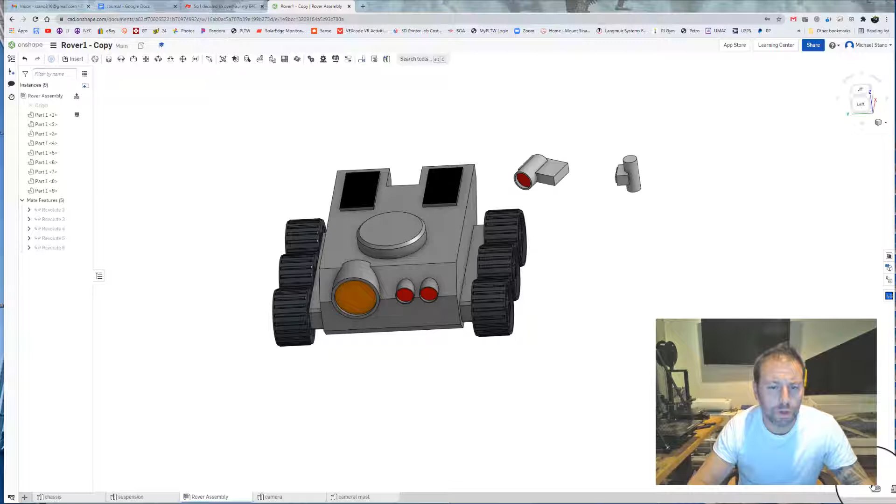Everybody, and today we're going to take a look at some different types of mates and gear kind of mates within this rover project, or really for that matter any project.

So we can see here I have a rover, 6 wheels, and if we want to make the one wheel move, you can just right click on it and hit animate. When you do that, you hit play, and then your wheel is going to move. And you can play with the playback options, such as the number of steps. So if I drop the number of steps to 100 and hit play, you can see it moves a lot faster.

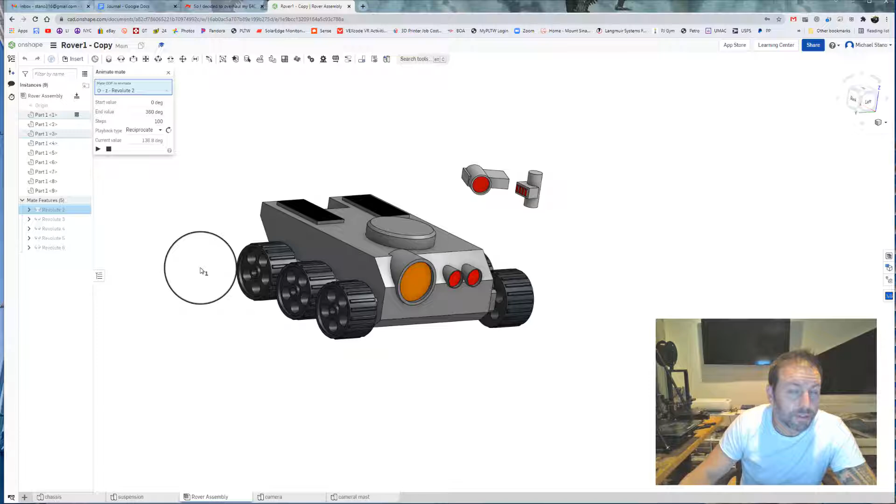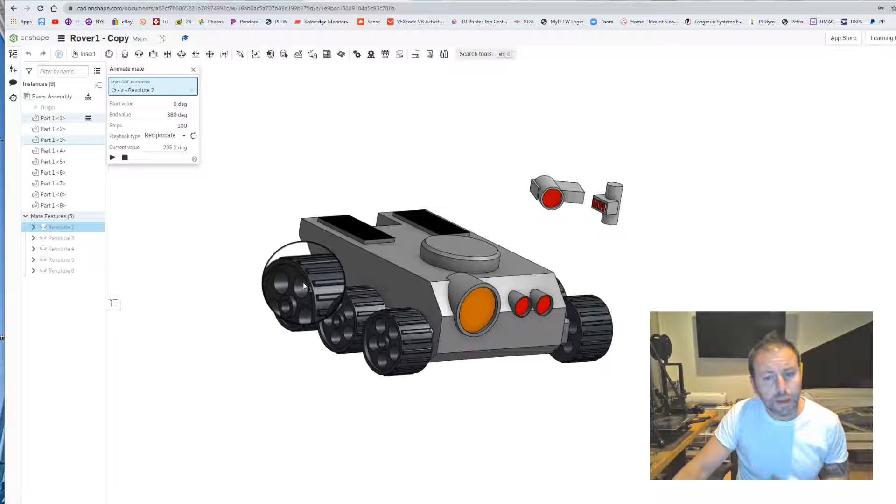That's all well and good, but if we want all these wheels to move together, we're going to have to use this gear relation up here. So by using a combination of mates and relations, we can get multiple things to move at once. So what I figure I'd do is I'll show you how to install this little camera system and mast onto here and kind of get everything to move together all at once. So let's give that a shot and get going. So for people that don't know how to use the mates, you'll get a taste of that here as well.

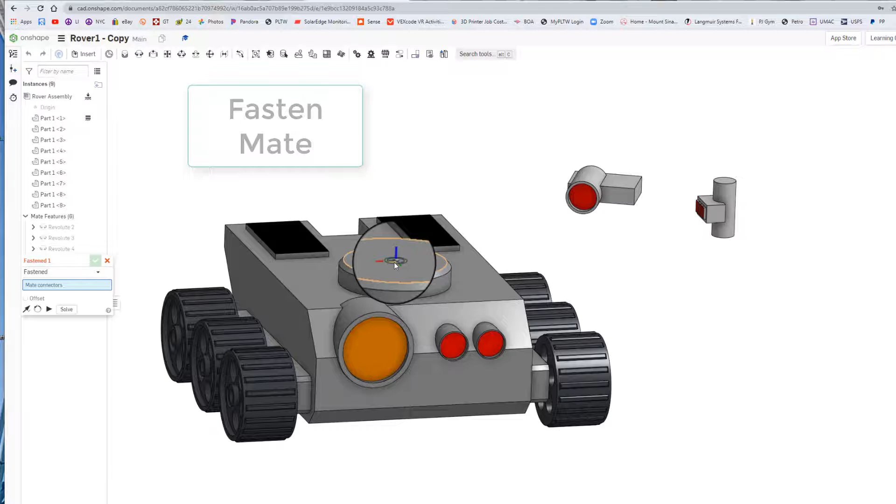So the first thing I want to do is I want to take this mast, which is for the camera right here, and I'm going to place it dead center on here. Now I'm going to use just a straight fasten mate. So I'm going to click the fasten mate. All right, click there right in the center, and I'm going to come underneath and click that in the center. All right, so now this is fastened to that. I can also change the axis that it's on, just in case they were backwards or not, and leave it just like that. So I'm going to hit the check mark.

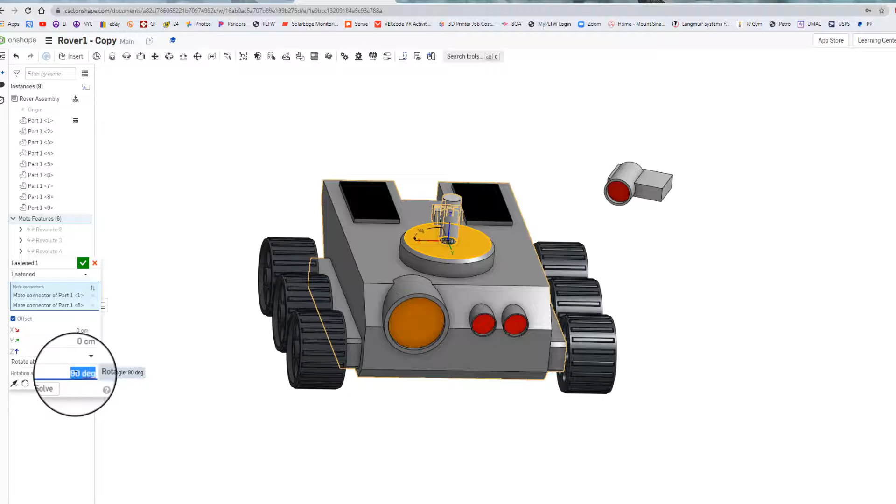Now, if I want this little side piece to stay there, I'm good to go. But if I want to change its location, I could right click on it, hit edit, and then I can come in over here and change any sort of offset or rotation around that X axis. So let's see, if I want to change the rotation around the Z axis, I can do that, and I can change it to say like 90 degrees. Then I hit it, and you can see that it now moved it to the back. If I want it to the front, I would probably have to go to 270. And there it is to the front, and I am good to go.

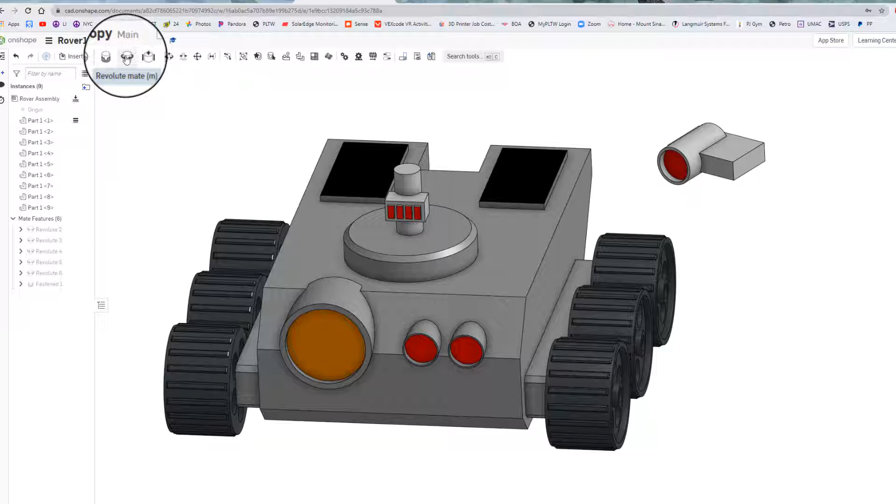So we're going to say that my camera system has these little buttons there in the front. Now what I want to do is basically set the camera on top of the mast. Now for that, I'm going to use a Revolute. So the Revolute mate will allow it to rotate along that axis. Right here, a fasten is not. It's going to stay solid the whole time. So you can see here on the bottom of my little camera system, I put the little spot there for it to mate. You could use a point or really anything else.

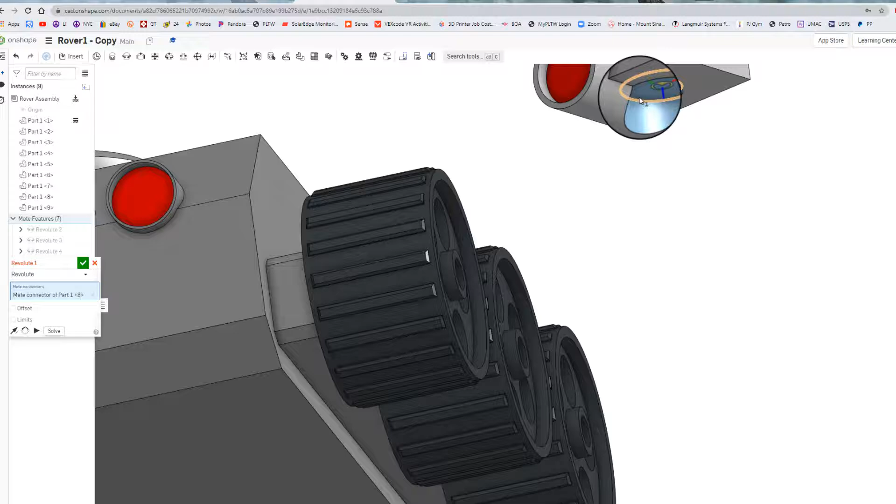I put a hole. So I'm going to go to Revolute Mate, click the top of that, come over to here, go into that circle, got it, click, and now my camera is mated to that. And I'm just going to hit the check mark, close that out over there, and now that's going to move. So if I want this to rotate around, click, animate, and I hit the play button, and now my camera's going to rotate. So right now that's only one movement, and it's easy enough.

But what if I wanted not only this to rotate, but the wheels to rotate, to kind of show as the rover's moving along the ground, it's also scanning the environment for whatever. So in order to do that, I need to use a gear relation. So that is right there, gear relation. So let's just check off on that.

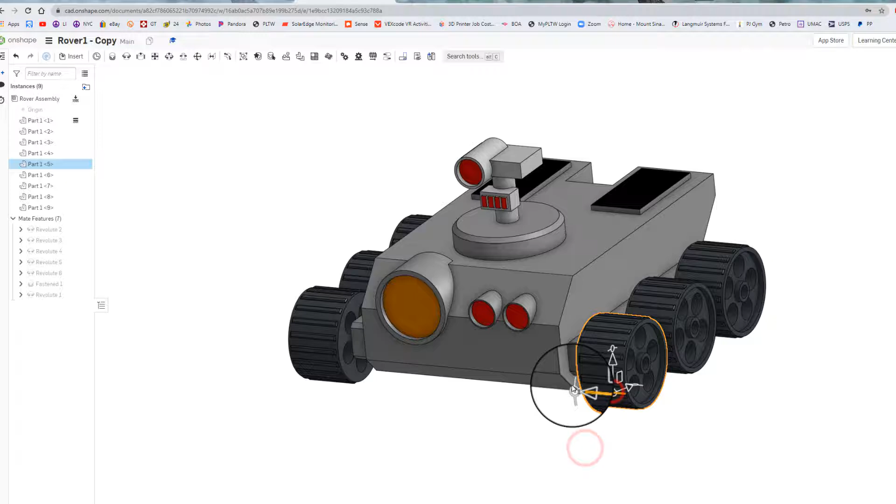So right now, if I take any one of these wheels, let's pick this front left one right here. All right, so let's see which one we got right here. So that's my Revolute 3. I'm going to right click. Let's hit animate, hit play. So right now, only one wheel is moving, and we want all the wheels to move. And we want them all to move together like it's moving along the ground. So in order to do that, we'll use that gear function.

So I'm going to pick a gear relationship, and I have to pick the mates that I want to associate with this wheel. So let's look at maybe the front 2 wheels. So we can pick that one right there, Revolute 6, and then I'm going to look for that other wheel right there, Revolute 3. So now those 2 wheels are going to be locked in together in a relation ratio of 1:1. So as one moves one full rotation, the other one's going to move a full rotation. And we can reverse the direction, but let's wait and see what has actually happened with the motion first. I hit the check mark.

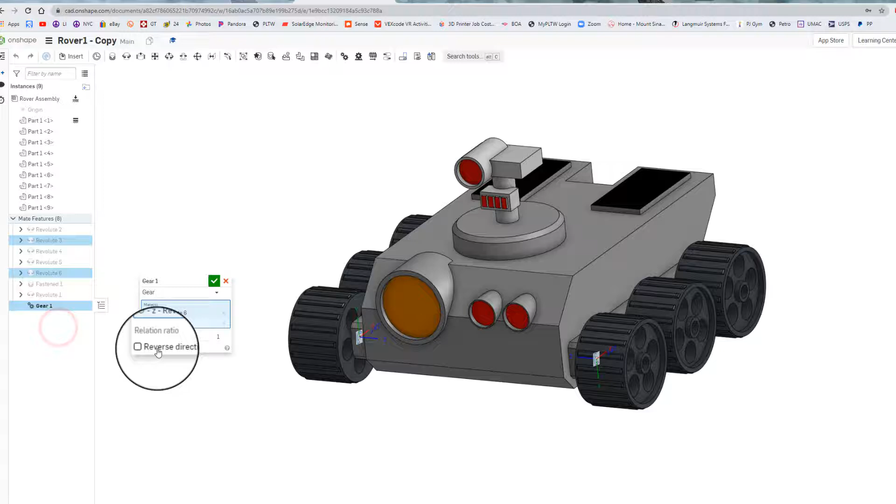So now I can go to that gear relation right here, and let's see what that was. Revolute 3, right click, animate that, hit play, and now my wheels are moving, both moving backwards. If I want to go forwards, I can go in and change the gear relationship. It's pretty easy. So right click, hit edit, reverse direction, hit play, and now when I go to that one, right click, animate. So now they're moving the wrong way because I reversed the direction of one and it didn't change the other. So let's go back and fix that.

Okay, so we animate that. I can reverse the playback there, and let's go loop, and now play. So now they're going in the right direction. Sometimes that'll happen because as you flip a wheel from one side to the other, it's the same part, the axis gets swapped. But I'm going to playback loop. I just reverse my direction there, and I'm good to go. So now those wheels lock together, and now I need to start locking the rest of the wheels together.

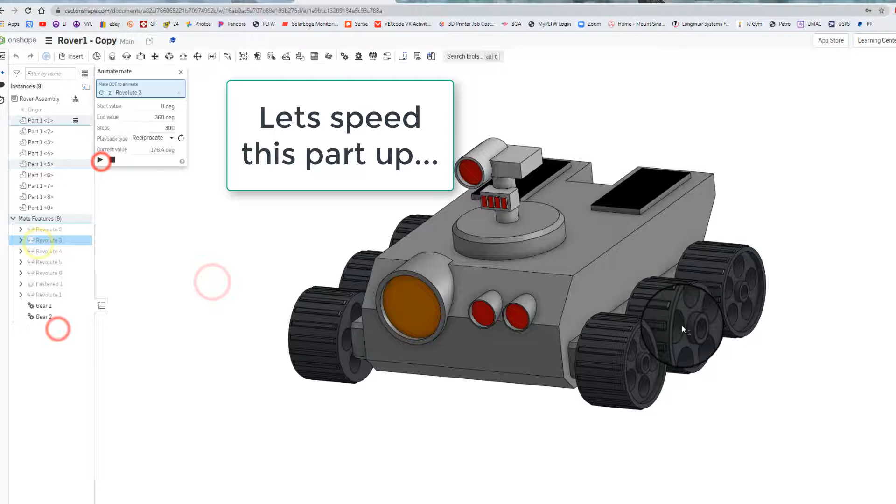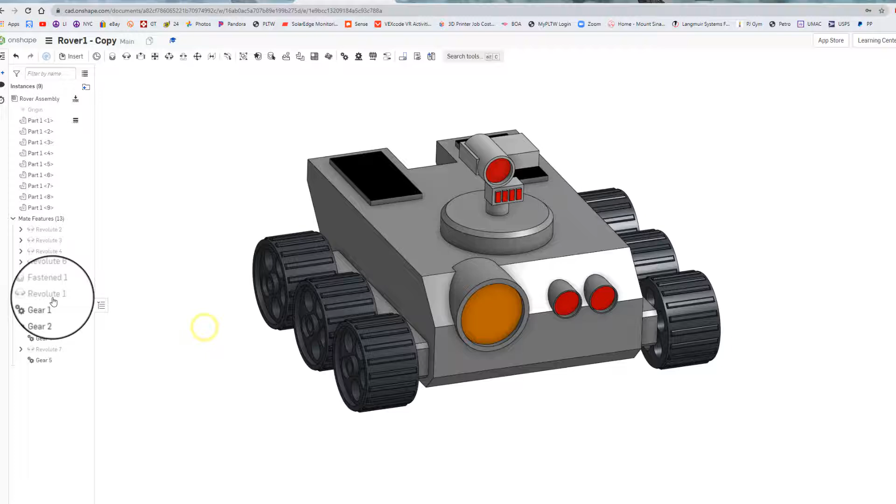And let's do that geared relationship between 3 and now 7. Check it off. Let's see if the rotation is good. Animate, play. There we go. They're all going in the same direction. And if I go to loop, all in the same direction, playing, that's it. It's moving forward. Now let's add another geared relationship to get this camera to rotate while it's moving.

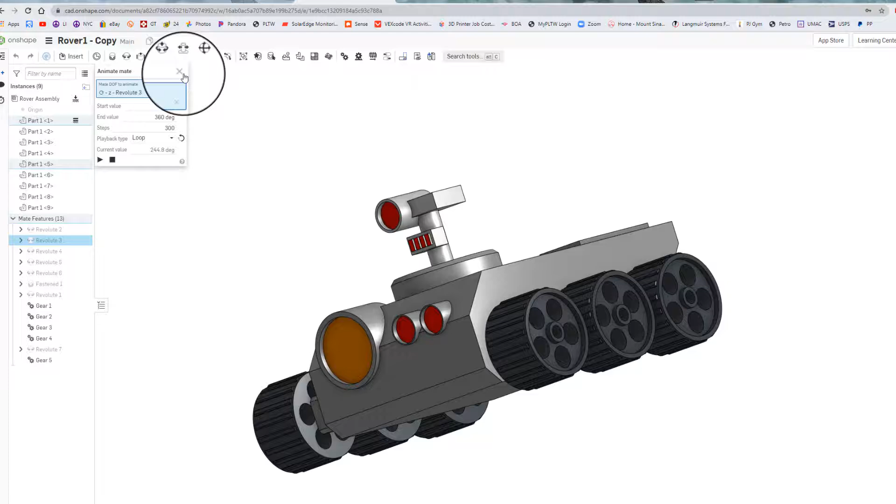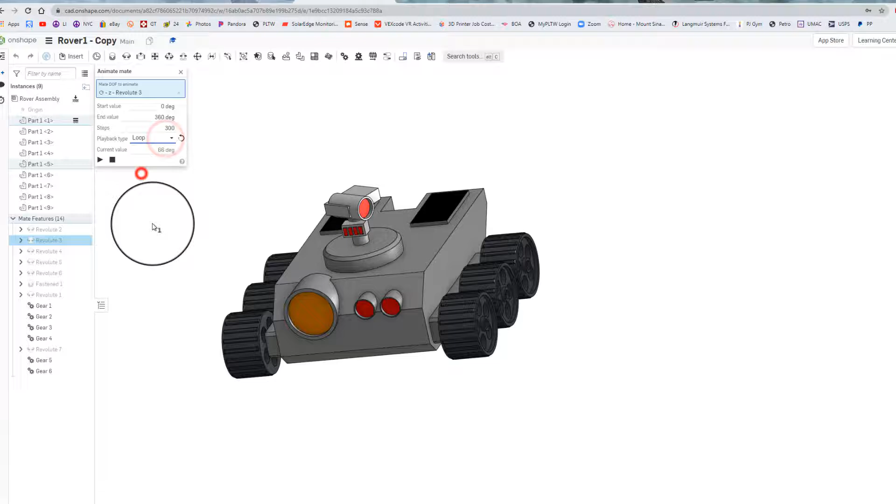So I'm going to rotate in here. Let's stop that. One more geared relationship. I'm going to do it with 3 again. Find that Revolute for that, which is there. Hit the check mark. Right click. Animate and play. And there you go. So as this is moving through its environment, it's scanning around.

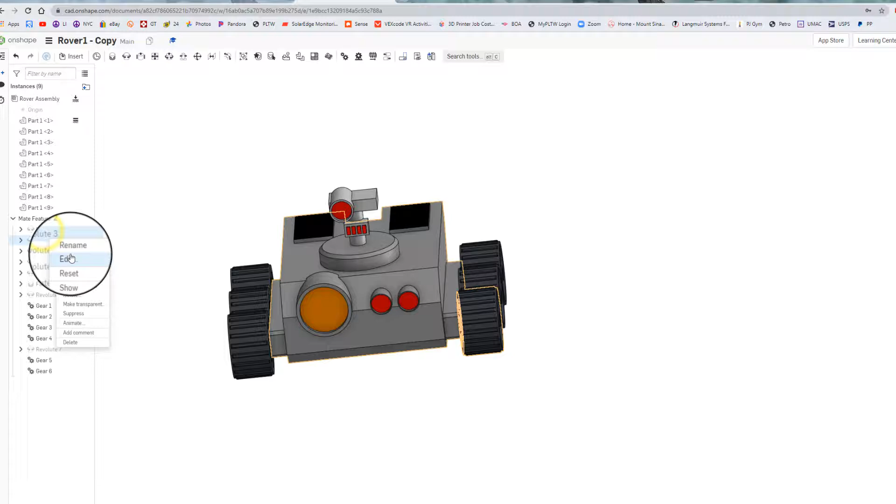Now, if I don't want the camera to move that fast, I can change the gear ratio associated with it. So gear 6, that's what it was. Edit. Let's go maybe like 0.25. Slow it down quite a bit. So I'll right click again, edit just to make sure. Relation ratio right there, 0.25. Check mark. Now when I go to that third wheel, animate. Let's change the direction. Let's go loop, play. And there you go. So now it's scanning real slow around its environment as it's rotating through.

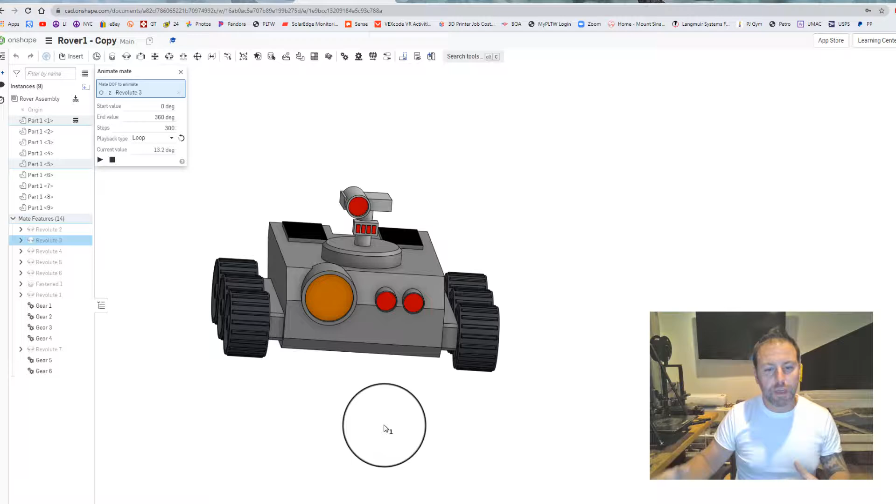And that's it. So that's how you use a Revolute mate and the gear relation to get multiple things to move together at once. All right, so next video we'll probably do a couple of different ones moving along, but that's really it. You want to use those Revolutes. Cylindricals will also help you out if things are not lining up, and with the gear relationship.